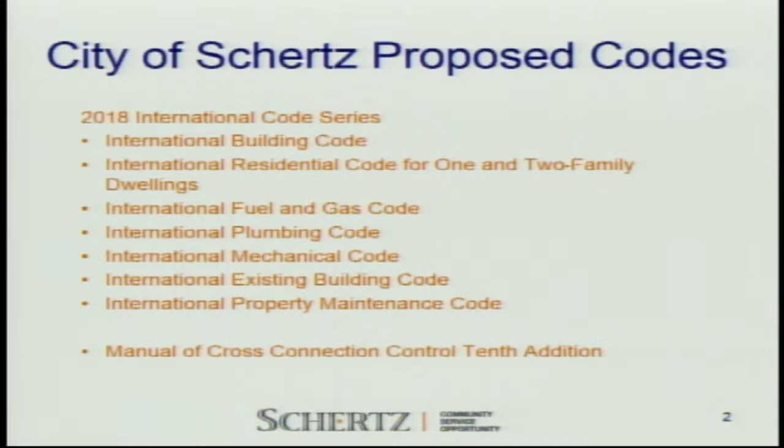What I'm going to propose for y'all is some of the significant changes, not in our ordinances, but some of the changes that have occurred in the books. This will not be a comprehensive list, but it will be some of the significant items that I thought should be brought before the commission to look at.

One of the first things is in the IBC, exterior balconies and elevated walking surfaces. There's going to be a new requirement that they provide detailed directions on how these are to be built. Because of the number of balconies that have collapsed across the United States over the years, this was brought into the International Code Council, and they've adopted new standards for these.

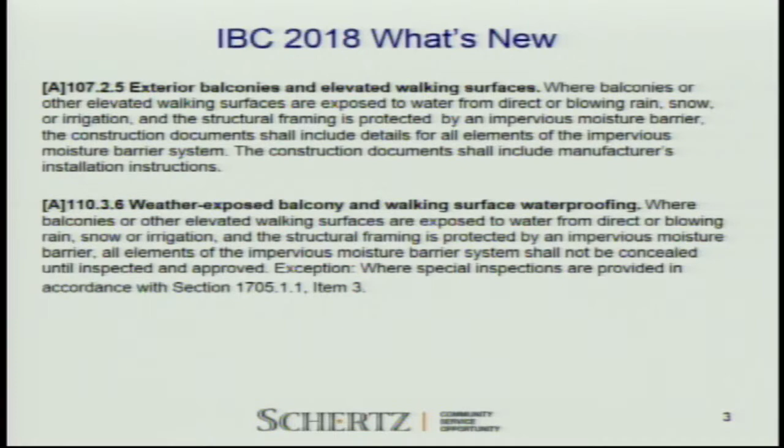In the International Building Code, they redid the items addressed as classifications of use under R2 for apartment houses, living facilities such as boarding houses, convents, dormitories, fraternities, monasteries, hotels, living and work units, hotels and motels.

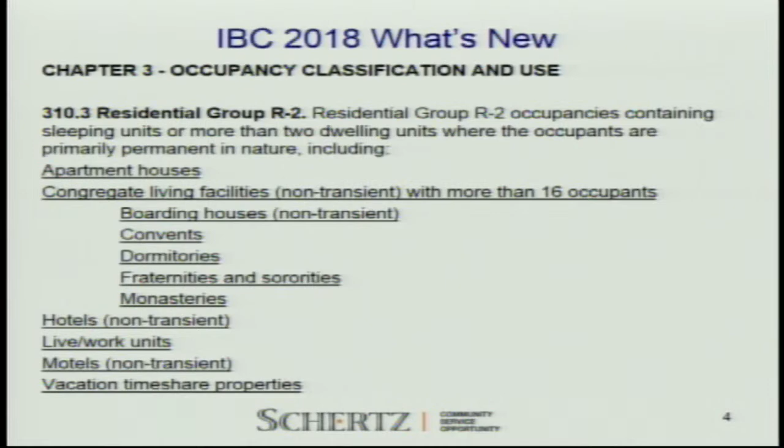If anyone has any questions on any of these, stop me and I'll answer any questions y'all may have. Another section that has been redone is Group R3, where they've included quite a few new definitions, and this primarily is around boarding houses and lodging houses. I think this has a lot to do with the bed and breakfast.

I'll ask you a quick question here. Do these two changes have any impact on our crash pad thing? I'm sorry, sir? The crash pads where we're temporarily renting to - that's what I was referring to by those bed and breakfasts. Is that what you're talking about? Well, no, no, that's okay. I don't want to get any - I just was wondering whether this had any impact on definitions of those things.

No, not at this time. I think what you're talking about is more of a zoning-related item that we've talked about before. Okay, thank you.

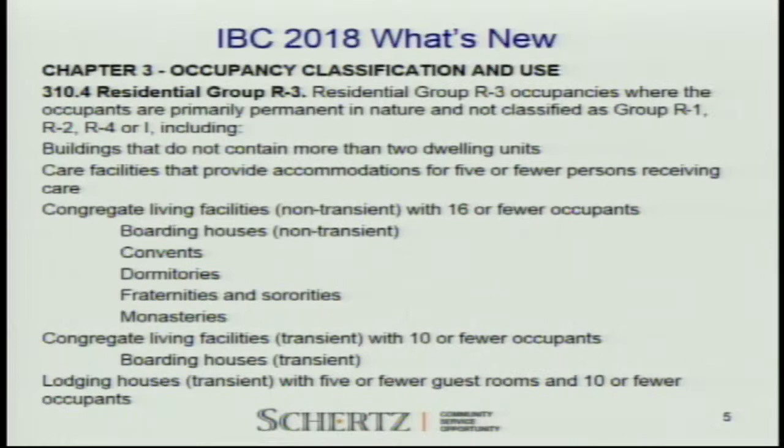Mezzanines in commercial locations, there's been a little bit of a better definition. It describes what you can and can't do with a mezzanine as far as it being an equipment platform in combination with a mezzanine, and it gives some new limitations in the building code as to how that use is to occur.

Another area is incidental uses where they have a stationary battery system, because of what we just experienced with the cold. We're going to see more of these coming into play, along with solar systems and generator sets on residential, commercial, industrial type facilities. This new code will have a definition where it's going to have to be separated by a 1 hour partition, or 2 hours in certain locations. That's something new that's coming in.

And then a crossover, which really surprised me, was electrical installations and transformers. There's going to be some new requirements that are actually referring back to the electrical code for what type of firewall and what type of egress is going to be necessary for an electrical installation, which I thought was very unusual. I was not aware ICC was even talking to the National Fire Protection Association, which they apparently are now.

Occupant load - there's been some changes which are going to be beneficial to small businesses and other locations in the city, where they're increasing the size of the square footage per occupant to 150. Previously it was 100. So you'd have a very small building, say 1,500 square foot, that would, because you're looking at the gross floor area, normally require one or more restrooms, or 2 restrooms, a bi-level drinking fountain, and a mop sink. By going up to 150 gross on the occupant load, that's going to drop that number.

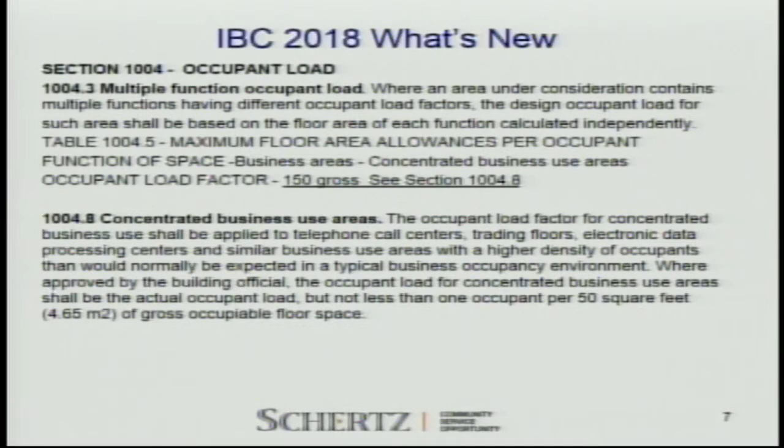The International Mechanical Code, this is just something I thought was interesting. For system controls for exhaust, that'll be the exhaust fans located in restrooms or other areas exhausting from a kitchen to the outside. Now those devices have to be identified as to use. Most of the time it's pretty simple, but in a restroom or kitchen, if you have a remote fan or something built into your Jenn-Air, you'll have a device labeled as an exhaust, and you'll easily identify what it is.

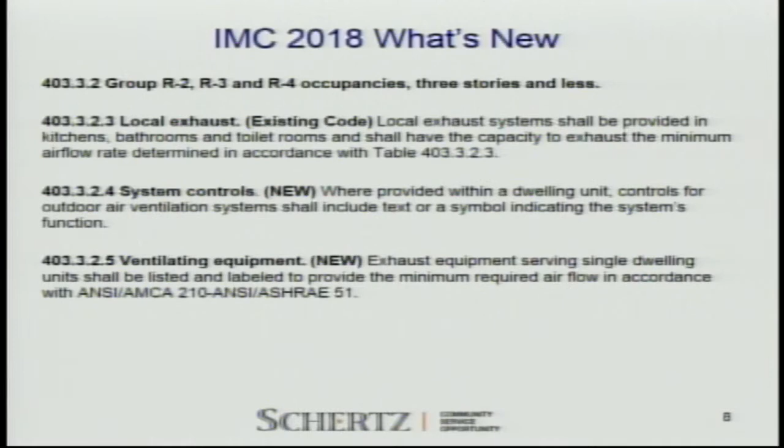This is going to be new. This is actually a carryover from the fire code into the building code or residential code for when you have solar panels installed on roofs, assuring an egress pathway from the second floor. If you have a second floor area or a bedroom on top of the second floor, that individual would have to use that window to escape. Now there's a requirement that the exit has to be easily defined, has to be at least 36 inches in width, and has to lead to an exterior portion of the roof that can be egressed by that individual, providing for self-rescue.

Another one is the setbacks. There's some requirements for that, normally 36 inches on both sides of a horizontal. So this is going to be in conjunction with the fire code. This section, I'm not sure if it still exists in the fire code, but it's been moved over into the residential code also.

So we'll be working in conjunction with the fire department to do these reviews on the plan reviews, and also to ensure that when we go out and do the inspections that all these requirements have been met.

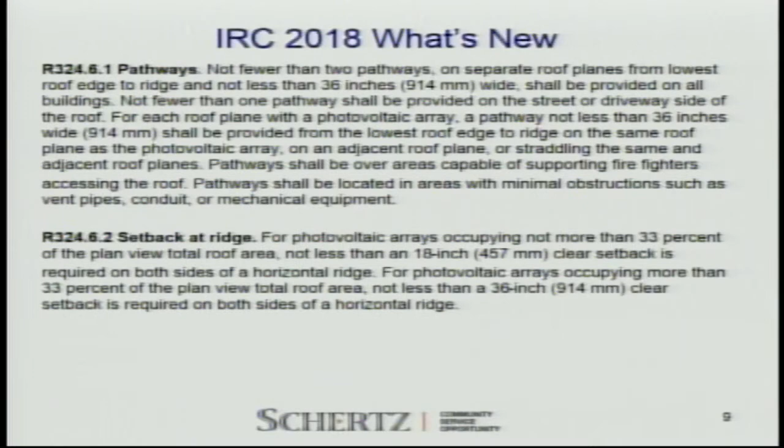And this, again, goes back into the rescue openings I was just referring to. Emergency egress and rescue panels, modules shall not be installed on the portion below an egress window. So I want to make sure that a child or an adult can easily exit that area and gain access off the roof.

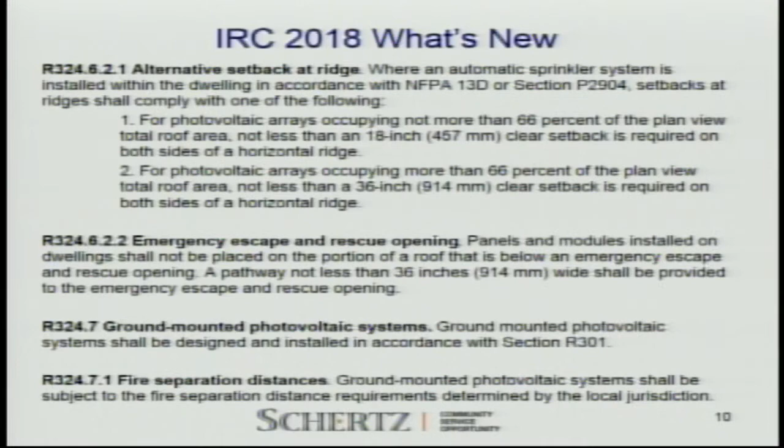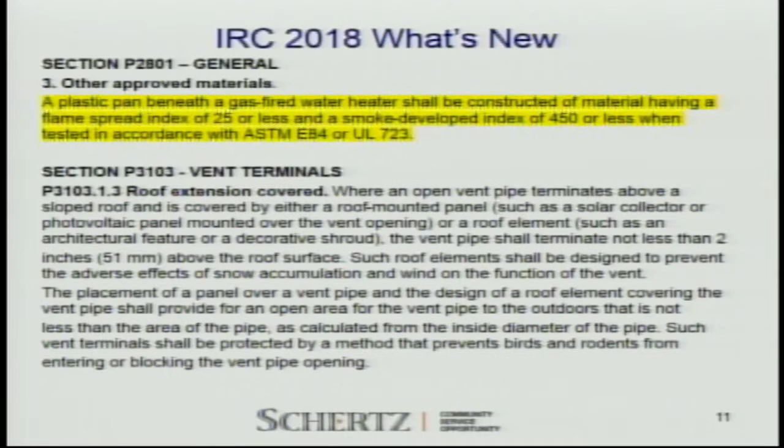This is one I just brought up. I wanted to show this because this is a plastic pan under a gas-fired water heater. It can be constructed of a material which could be plastic, as long as it has a flame spread of 25 or less, and has a smoke index of 450 or less. In the International Plumbing Code, exactly the same thing - it says a plastic pan shall not be installed under that same gas-fired water heater. I don't know why there's a difference between those two.

And that'd be up to y'all if you want to continue to accept that, or if you want me to change that and put that as a suggested alteration to remove that and have that continue in both the IRC and the IPC as the same standard.

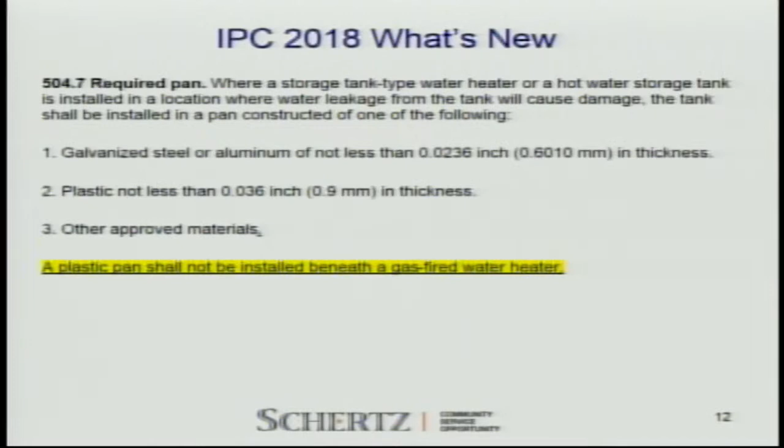This is brand new. This is the National Electric Code. This is something that has been coming for a number of years. Everybody is familiar with arc fault and GFCI type devices, or the combinations they have in houses. Those devices are very prone to failure. There's been a lot of failures. So what the National Electric Code has determined through the National Fire Protection Association is that the cause of this is overvoltage coming into the building from either phases slapping together, your neighbor's air conditioning unit, or a utility coming on and putting a voltage surge through the lines, causing these mini computers located in these devices to fail.

So what they have now done is added a brand new section in the electrical code, both as part of Article 230 and this section here at 242, over voltage protection, which requires either a T1 or T2 type device - a metal oxide varistor - to be installed at or near the service. This is designed to prevent those surges from coming through the home into the house, destroying your electrical equipment. So this is what the electricians have decided and have suggested as an alteration, also coming from the manufacturers of these devices, to help prevent those devices from failing so frequently.

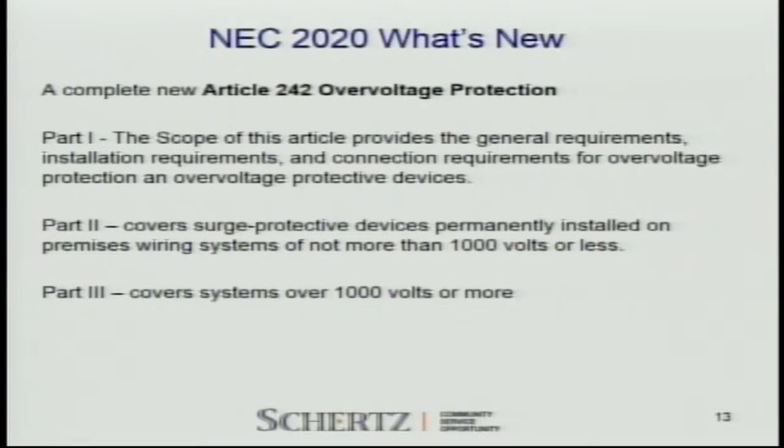And this is Article 230 where I was talking about, where it either has to be a type 1 or type 2, and this will apply even if the service is just being replaced on an existing home. So if the house has a service that burned down, or if the service is being upgraded, these new requirements will go into play.

What kind of cost delta is that? There's a bunch of different types. You can get the type that's a breaker you install, which goes to a MOV unit installed on the side of the panel board, or it can be ahead of the main. They run anywhere from $60, the ones I've looked at, to $150 or more, depending on the device. Most of them are sacrificial in nature, so they're designed to take a surge and then die. I've seen both alarm types, and I've seen ones with just a light that tells you it's no longer functioning. I personally prefer the light and signal device.

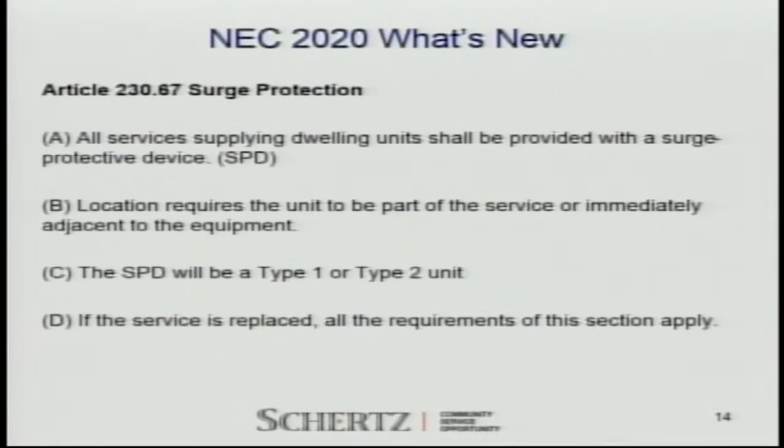Now, some of our local amendments, which we're asking y'all to consider for approval to take to City Council: we deleted wording in Article 1, the beginning of the code. We recommend updating and deleting a lot of the wording to bring the codes into consistency with our digital processes and the types of inspections we do now. We've also added changes to the licensing requirements for electrical, plumbing, and mechanical.

There's currently a state bill requiring mechanical contractors to comply with the same requirements as electricians and plumbers, which means the city cannot charge a fee for registration. By doing this, we're actually ahead of the game, beating the state to the punch on adoption of this code. This also pertains to insurance requirements, no longer requiring those licensed by the State of Texas to provide insurance to us. We'll be able to easily look online and verify the contractor actually has the insurance.

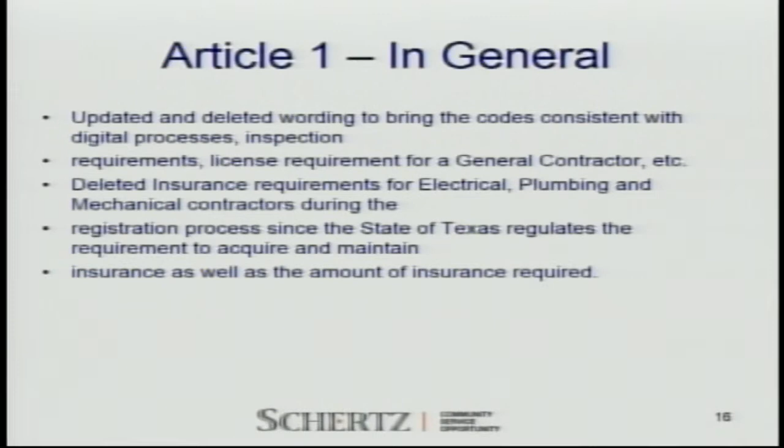For the building code, we've added definitions for pergolas, arbors, and trellises under 300 square feet, defining what an arbor, trellis, and pergola is.

We're asking that y'all consider and recommend to City Council that rooms and spaces for all handicap restrooms have an emergency light fixture, and also that an emergency light be placed in classrooms near an exit, either at the primary or secondary. The building code has also adopted very stringent requirements for remote locking devices for classrooms, because of everything going on in our days and times. I won't cover that today, but I feel this is a life safety feature, which I hope you all consider recommending to City Council that we adopt.

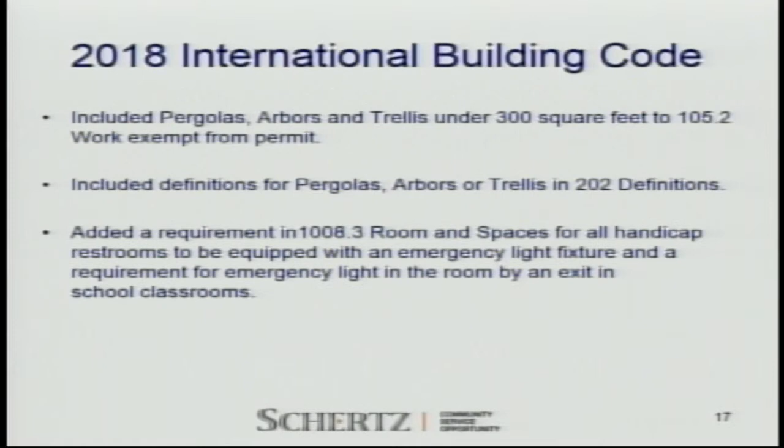We deleted 8 of the engineering foundation requirement documents, leaving only 2. The rest of these 8 will be covered under special inspections. We've also updated our sound attenuation requirements for the certification process, which will allow the contractor to sign for it.

We've added an appendix for shipping containers being utilized for permanent use, along with a lot of requirements as far as details for how the units are to be constructed, what letters or documents we need indicating the structure is safe, and requirements for foundation and placement, as well as protection for surrounding neighbors within 500 feet of the unit, ensuring an approximate same value of construction and type of exterior attributes of the building.

So if you've got a 4-on-12 pitch on all the adjacent roofs, this structure will also have to have a 4-on-12 pitch. Or if it's all masonry around you, you've got to have masonry on this. So there are some protections built into this new ordinance that I put together.

Another quick question. I thought the change in the laws last legislative session meant we couldn't dictate construction materials anymore - the state withdrew that authority.

We don't have that authority, but what we're doing is stating that materials just have to match the surrounding structures. So if you have a $400,000 house and somebody wants to build one of these containers next to you, they have to use similar components as your house, in order to maintain taxable values and home equity.

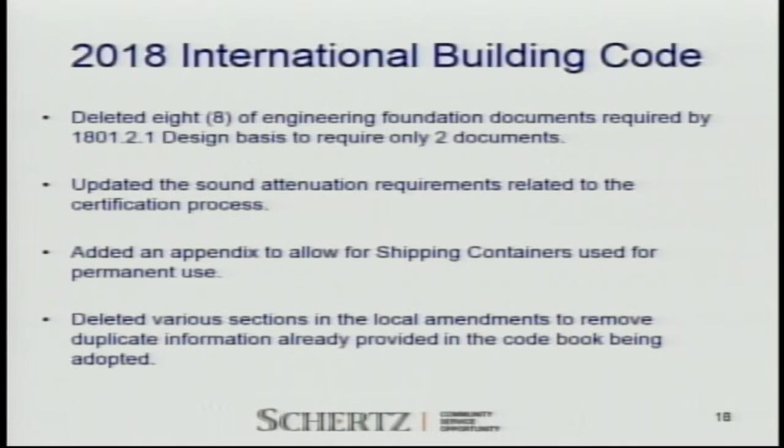In 2018, we covered the same thing with arbors and trellises. We just adopted that straight across the board, and it applies to both residential and commercial.

For the foundation requirements, we added an exemption for engineered foundations under 300 square feet, where we provided the worst case scenario. Instead of having to dig through the book, I wrote it all up to make it simpler to design a foundation.

It specifies 24 inches deep on the outside or to a bearing strata, gives the type of rebar to use and the spacing. I tried to include as much detail as possible to avoid requiring someone doing a small addition to hire an engineer.

I don't think there will be any deviation in the amount of security or stability of that foundation as long as they follow the minimum design standards.

We did delete 7 of the engineering foundation documents. We're requesting that the board consider going down to 3 documents. We're receiving almost everything we need now through our plan reviews and inspections. By reducing this to 3 documents, I don't believe we'll be reducing at all the assurance that the customer is still getting a good, stable, reliable foundation.

We also added a table that's required by code called Climatic and Geographic Design Criteria. It's very extensive, covering details for wind loading, snow loading, atmospheric occurrences on the building, and it also helps with designing the air conditioning system for the structure.

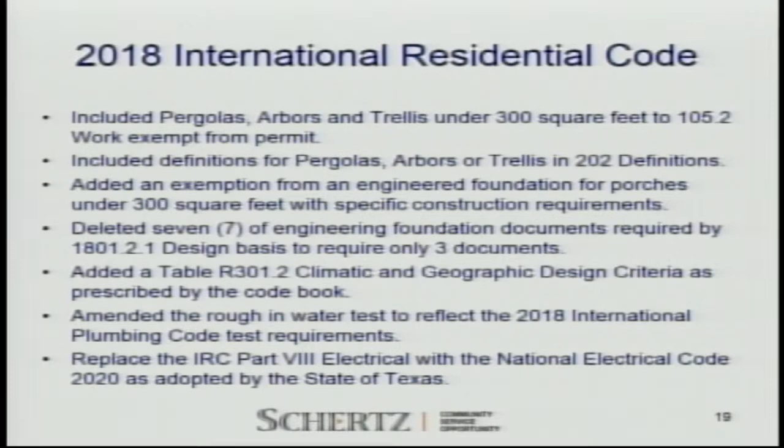We're recommending the adoption of Appendix M, home daycare; Appendix P, sizing of water pipe systems; Appendix Q, tiny houses; Appendix R, light straw clay construction, which is pretty popular up in Austin right now; Appendix S, straw bale; and Appendix U, shipping containers. We adopted it both in the IBC and in the IRC, so it has the exact same requirements.

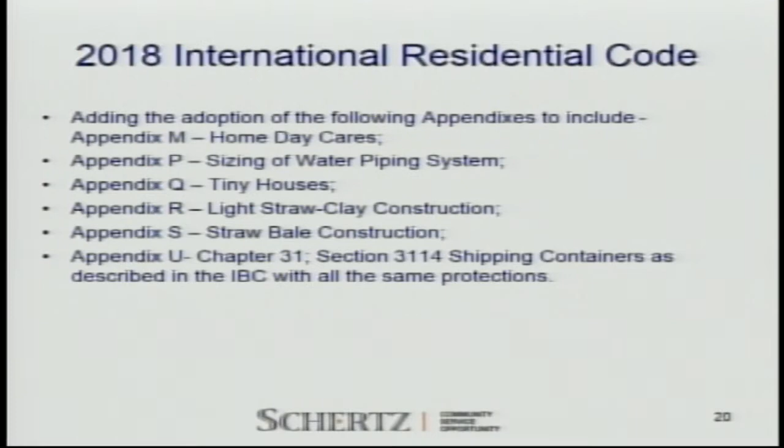The 2020 Electrical Code: we're deleting branch circuit requirements for bathrooms because that's now covered in the new 2020 code. Minimum ampacity is covered in the 2020 code, and dwelling unit receptacle locations in bathrooms are covered in the 2020 code as well.

We added section 230.70(A)(1), a requirement for services to be readily accessible, to help define what is readily accessible. This applies to both residential and commercial locations. The current 2020 National Electric Code addresses residential homes as being readily accessible, but it does not address commercial or industrial locations. Our current code takes it one step further, and the national code is just catching up with us.

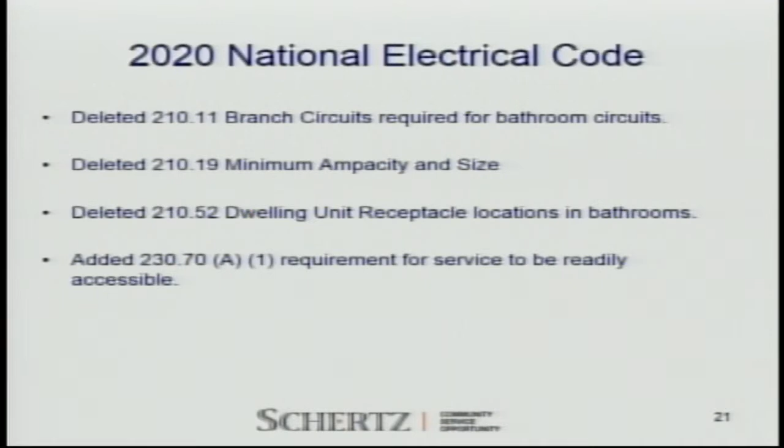International Plumbing Code: we're deleting pipes through foundation walls. We're deleting the testing exception for lawn irrigation systems because that's already covered under the plumbing code and the IRC plumbing code. We deleted Table 702.3, sewer pipe for cellular core. We're just going to let the manufacturer's installation instructions mandate how that piping is to be installed.

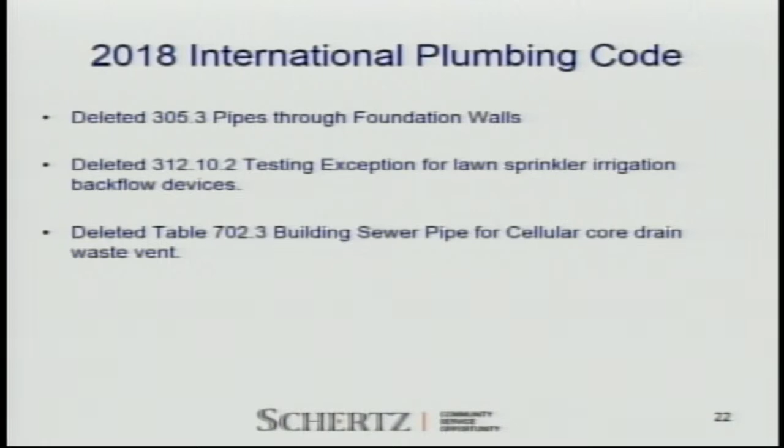For the plumbing code, we're also deleting Appendix C, vacuum drainage systems, because this has been added to the code as an actual requirement now—it's in the chapters. It was changed to Appendix C for structural safety, which was included. We deleted Appendix B, rates of rainfall, but kept Appendix D, degree day and design temperatures, and Appendix E, sizing of water piping systems.

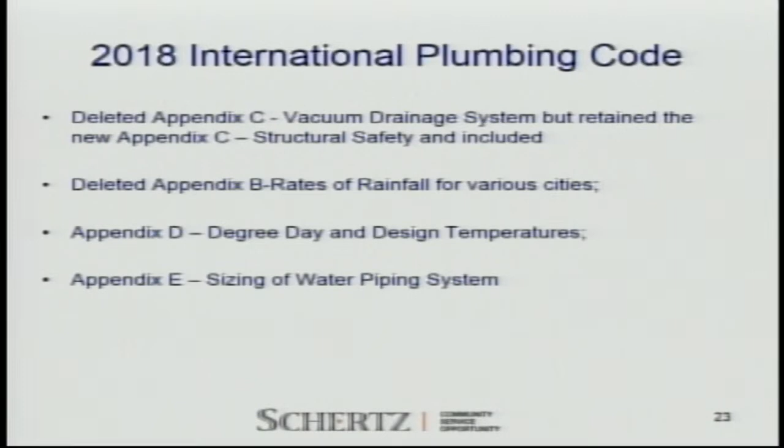The other codes, which we don't have any changes happening to, would be the International Fuel Gas Code and the International Existing Building Code—no changes. The International Swimming Pool and Spa Code had its appendices deleted because that was adopted by the state of Texas. It is now regulated through the Texas Department of Human Services, I believe is what it's called, so it's mandated through the state now.

We didn't make any changes to the International Existing Building Code. There are no changes to the 2018 International Property Maintenance Code, and no changes to the 2009 Manual Cross-Connection Control edition. We didn't recommend any changes; we just kept it as is, which defines the location of these RP devices for residential and commercial industrial facilities.

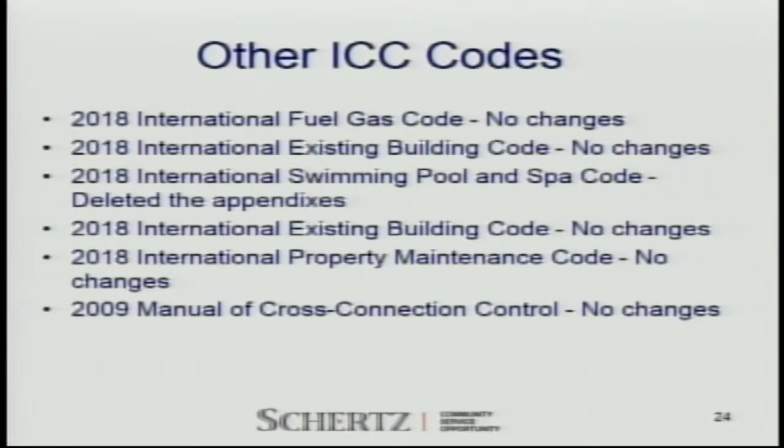That concludes my presentation. There are quite a few other slides with a lot more detail on some of the significant changes in the code books—that's another 50 pages. If y'all want to see those, they'll be available, or if you want to talk about them now, I can run through anything that y'all would like to discuss.

I do have a question. I just happened to come across a situation with your backflows for irrigation systems. One of the requirements is that it's a certain height elevation above the highest sprinkler head, and I know I've built houses with backyards upsloping or tiered where that thing's not going to be 20 feet in the air. So I don't know how that's addressed now.

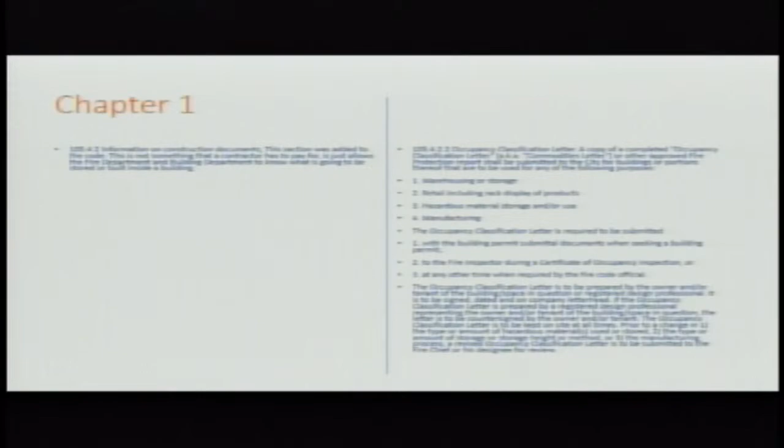If I could insert something here to help my fellow commissioners. This occupancy letter is used during plan review, and it has a lot to do with designing the sprinkler system to the correct standards. It's really helpful to know what they intend to put in the building so you can ensure the fire protection systems are designed correctly. Is that correct, sir? Yes.

So if you've got like a magnesium factory, a water sprinkler is not going to help you out in that situation. Well, it could be, or they could design it to require a pump, a large diameter pump system with more heads - not for magnesium, but just in a general sense, high pile tires is going to require something different. So it's important that we know that, but it basically makes the appropriate system be designed based on exactly what's there.

There are quite a few variables, and it has to do, as the chief said, with what you're storing, how high you're storing it. Is it wrapped in plastic or not? Is it in cardboard boxes? In addition to the product itself, all of those things impact the design requirements, sprinkler spacing, water flow requirements, and all those kinds of things.

For a long time, what we were doing is if the contractor couldn't tell us exactly what he was putting in the building, we made him design it to worst case. So this just makes it a lot easier for the fire department folks, and it's more focused on the installation for the design company. They don't have to do the whole building that way - they can do it differently in each area based on what the classification is showing in those areas.

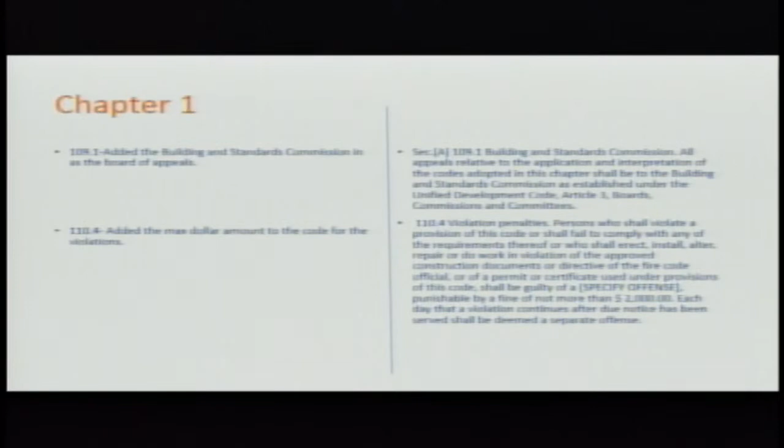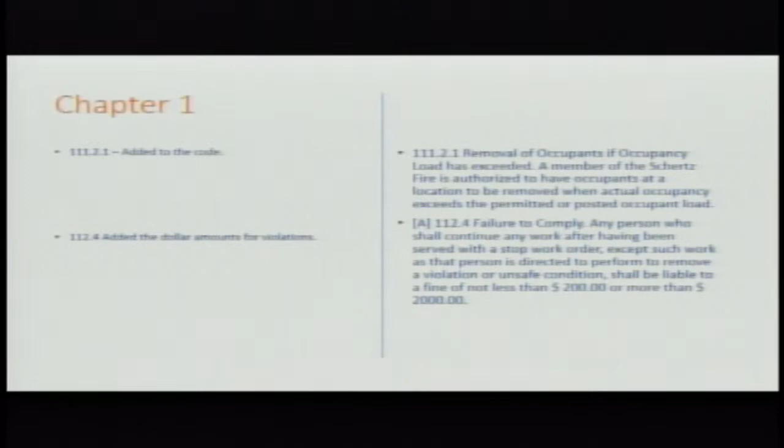Chief, would you rather take questions as you go, or would you rather I wait till the end? Just interrupt me as you go and we can do it slide by slide.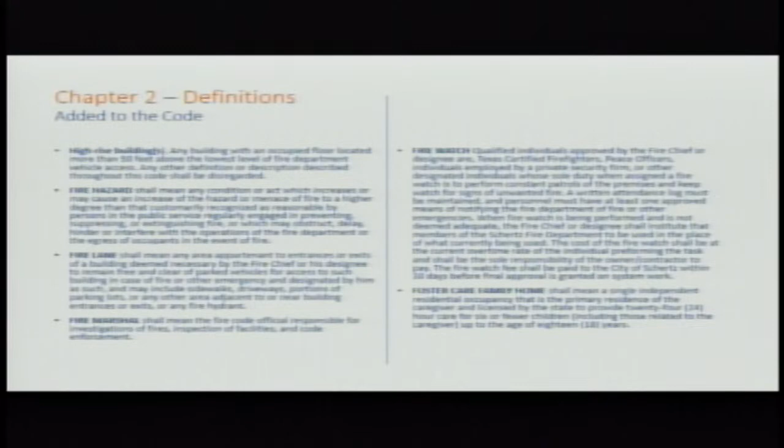Okay, again this is something we kind of updated last time with the mobile food establishments. So again, over on the right, we've added special events. That's one of the new things that come in this code - the occupant load, based on some of the new wording in the new code, is going to put more requirements in place for some of those events as well. So we just kind of defined special event on this one, not a whole lot new in this one.

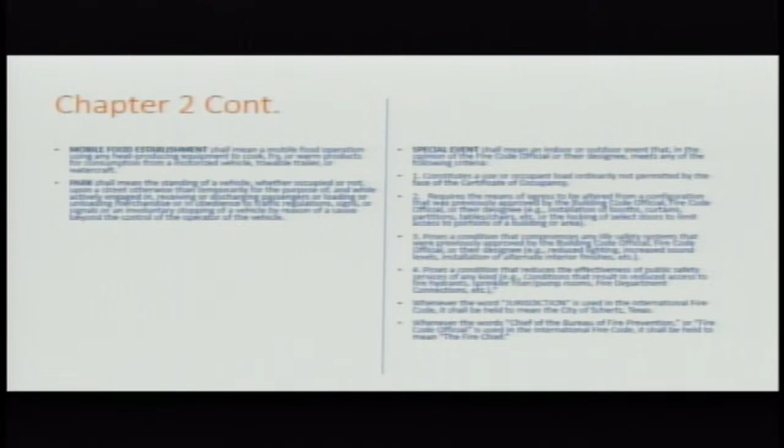Moving on to chapter 3. Looking at chapter 307.6, this has come about before with some memorial services or birthdays, and that's kind of how we ended up here with 307.6 - sky lanterns. We've had like 300 people at a memorial service all going to light candles in a sky lantern and let them float off into the community. So that's how we ended up putting this in here.

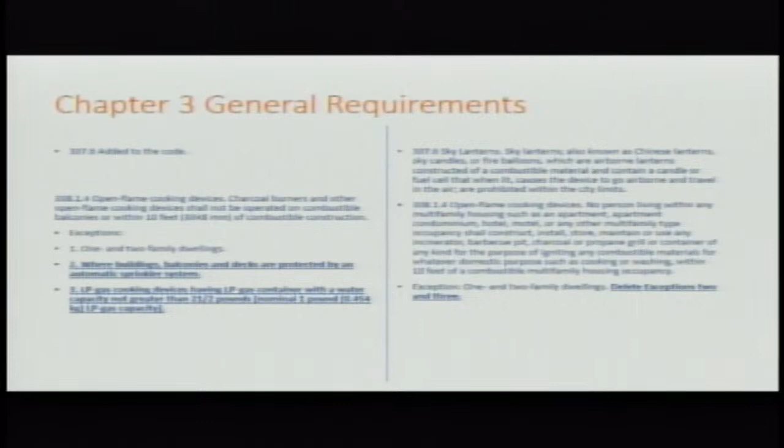Or the other one here on open flame, 308, open flame cooking charcoals. This is meant to be at multifamily residentials, and essentially we're deleting the exceptions here to cook out on a balcony, saying you have to move 10 feet away from the structure to barbecue at a multifamily dwelling.

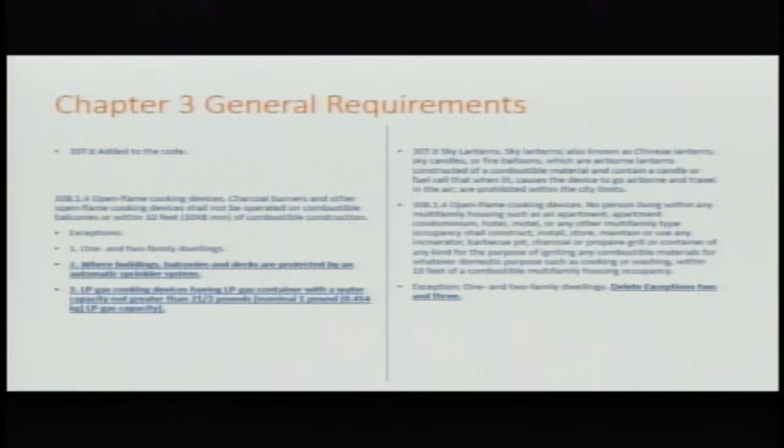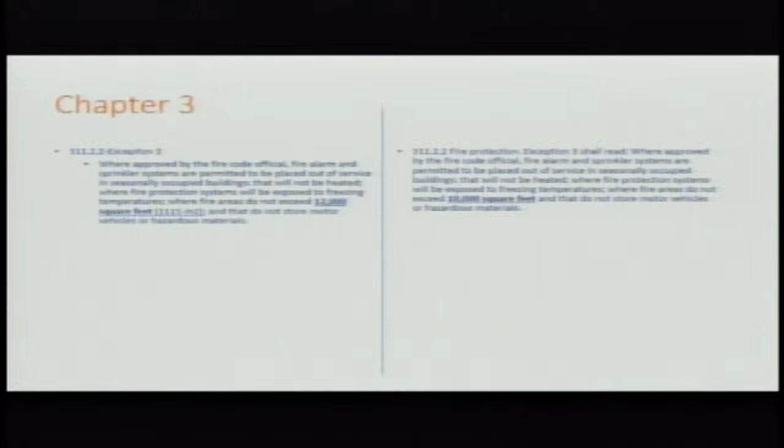In here, this is just a requirement we've had from early 2000s, where we're saying a sprinkler system be installed at 10,000 square feet instead of 12,000 square feet.

Chapter 4, again this was all brought forward, but it just lays out some of the fire drills and stuff for schools. Nothing new in this particular area. The obvious question here was, doesn't the state have requirements? So I looked them up, and yes they do, but it also says if the local authority has requirements, then the school shall follow those. And they've got to maintain records of those as well.

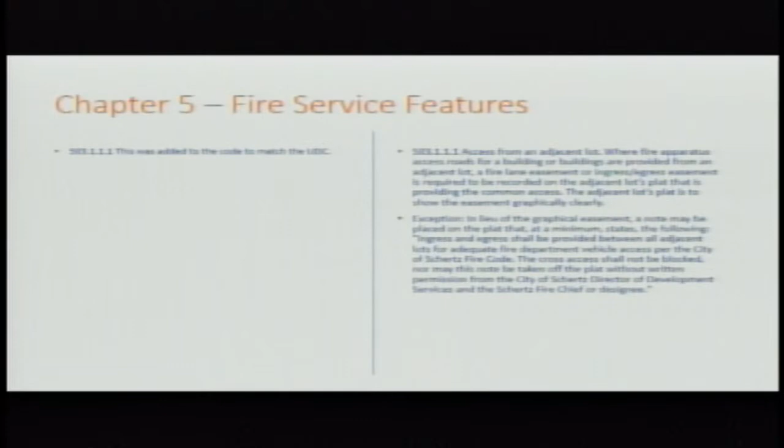Again, just clean up language here from the UDC on this chapter 5. Most all of this, like you said, is just directly out of the UDC and/or engineering.

Yes sir, can you just clarify something for me? It says basically the width is 24 feet, except where a fire hydrant is located on a fire department access road. So does that mean it has to be more than 24, or it can be less than 24 if the fire hydrant takes up part of that space?

Yeah, and so just for your knowledge, what we do on a lot of those is we look at the actual specs on our apparatus, usually the biggest apparatus that we'll be using for that particular design, and that's what we base our code off of, just for your knowledge.

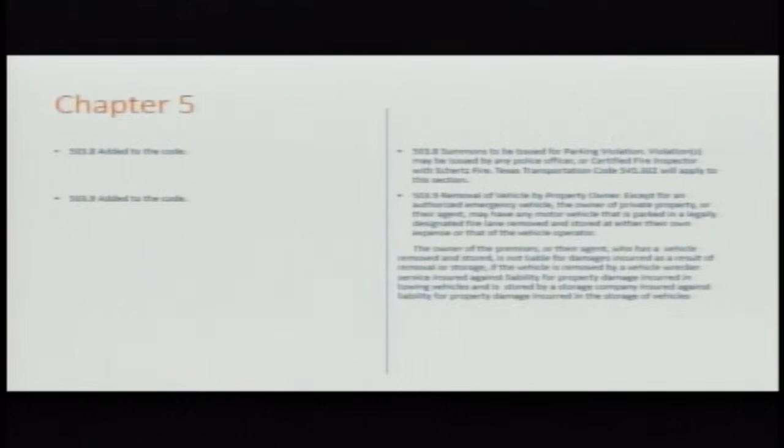Again, just on the right here, most of it's coming forward from the previous as well. When you struck out mountable curbs, was that just meant that we were not going to approve a mountable curb? You have a section in 503.2.1 where we struck out mountable curbs, and I was just curious if I just put in a bunch of mountable curbs, but it wasn't in the fire lane - if that was no longer going to be approved, basically where you have a small little curb to get into your driveway, and that was struck out. I was just curious why. No, all of that was brought forward. That's just going to be language that's in the development. Gotcha, all right.

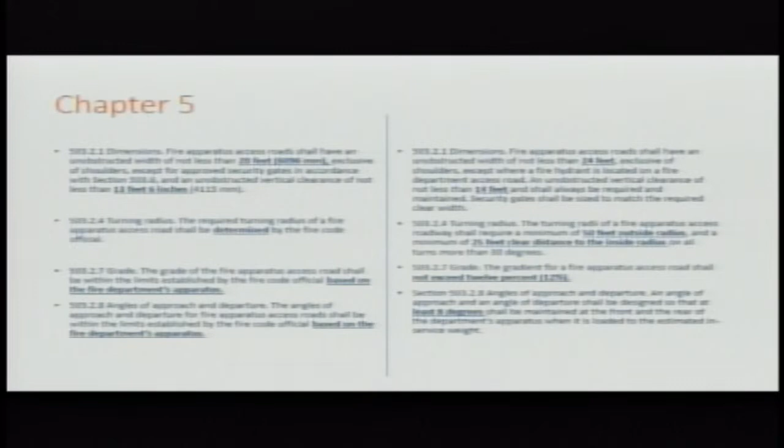Again, all of this is pretty much brought forward as well, just talking about removing vehicles that are parked in front of fire hydrants or in a designated fire lane.

It's like in the movies when you break both windows and pull the hose through. Yes.

Again, this is just talking about, back to the code, not really defining, just saying gates open in 15 seconds, so just putting a number in there for the code is what this is doing here on emergency access gates or HOA gates.

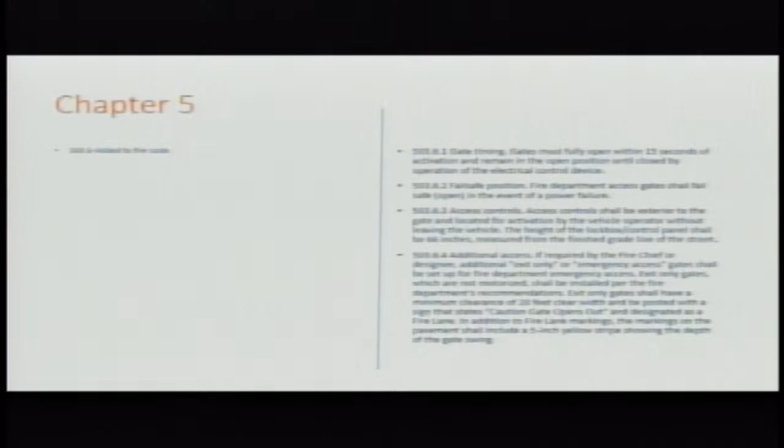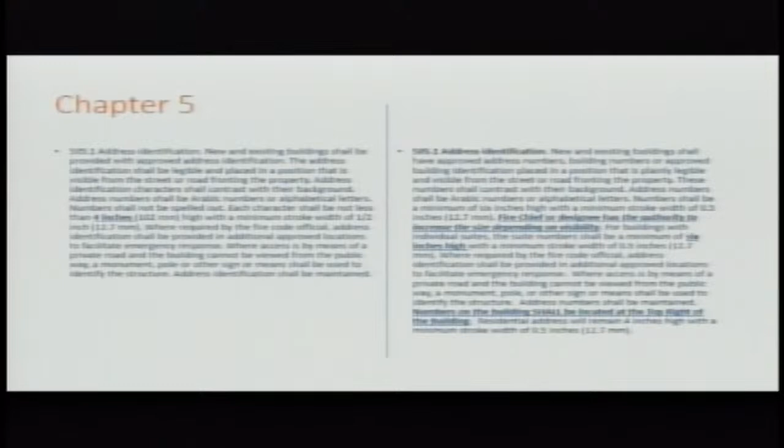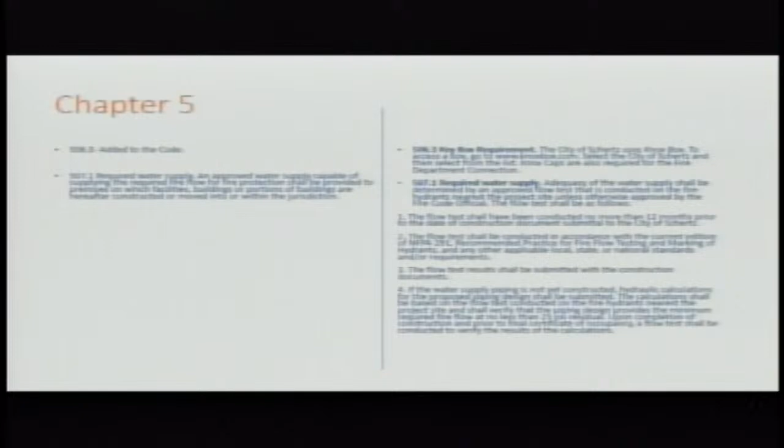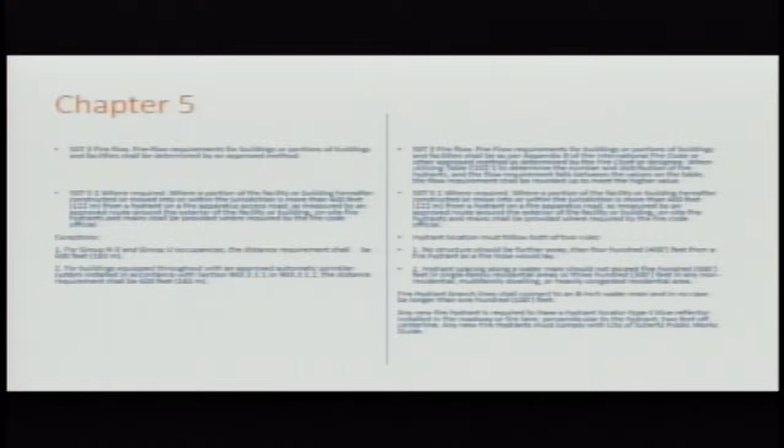Yeah, most all the water is directly from the engineering or public works. Engineering. Yeah. Yes.

Okay. Yeah, I try not to read every slide to you. Just pick some of the stuff. So, okay.

If, because we saw the building department, in their amendments and adoptions, they eliminated a lot of duplication. And that question here is if these things are already defined in another city code or requirement, is it really necessary to put them in the fire code?

So we've talked about that, and like I said, most of what you're seeing here is coming directly from engineering and what they're using, and/or public works. So this just puts it into a code format and has something to stand back on and allow people to see what it is. That's why we try to get rid of a lot of the duplications, but we feel like this part is just kind of cleanup, but it's also important to us coming from the fire side on water. So that's why we felt it was important enough to keep in here, so it becomes, from the fire department standpoint, a code enforcement side from the fire department on these particular things when it comes to water.

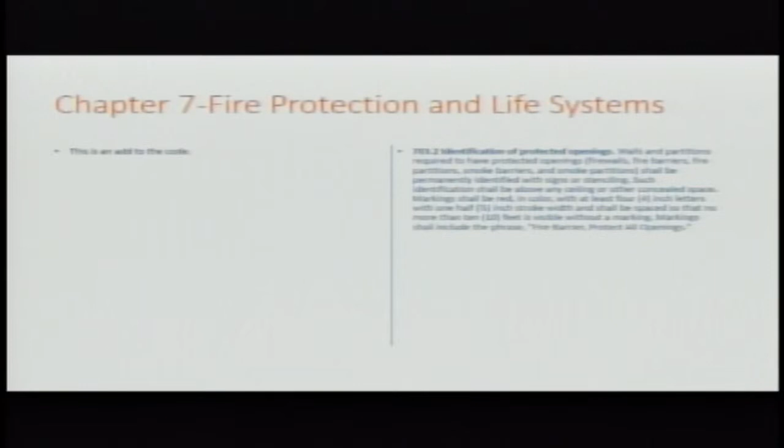And if I might make a suggestion for when this goes before council, it might help them to know that we're proposing, and we've always required above 10,000 square feet. In this case, I think the code says 12,000. So it might be helpful for them to see what the code requirement is if we don't amend it, to give them a better feel for whether we're really asking for that much.

And then on A1, when I look at the 2018 fire code, they have item number 4, 903 for a multiplex cinema. Did you intend to leave that out of your list? The code says the fire area exceeds, I think 12. The fire area has an occupant load of 300 or more. That's out of the code. Number 3 is out of the code, but then they also have a number 4 that says if it contains a multiplex cinema.

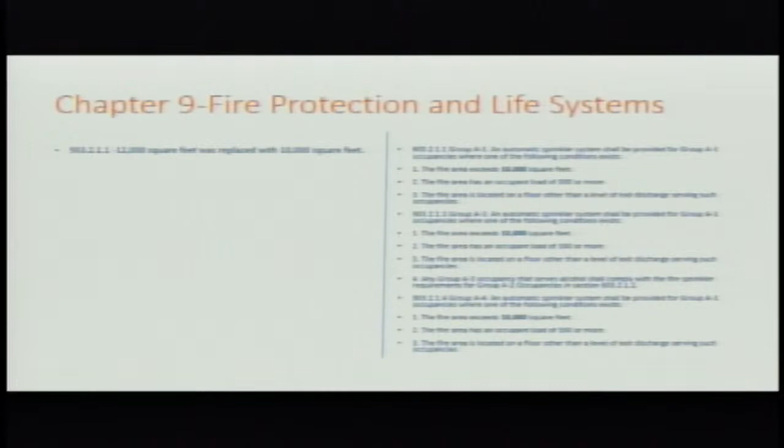There, in the text version, you're saying? Yes, not in the red lines, but in the clean version. If it'll help you, it's on mine, says page 15. Okay. And generally speaking on these, if it's not addressed here, then we're just going with what's in the code. Other than that, so we'll look at that and see.

Again, this is just to summarize. This is talking about adding notification devices on a building that has a sprinkler system in it. So that's summarizing. Yes, thank you.

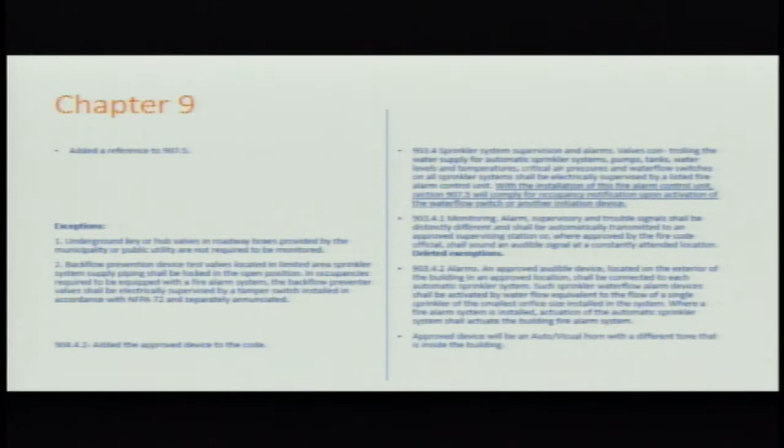I always found it hard to believe that a fire code would require this, but it is possible. You look at these warehouses we have in the industrial area, and they were required to put in a monitored sprinkler system that when activated would send an alarm to a central station, but it wouldn't bother to notify anybody in the building. That always defied logic. Surprised whenever the fire department showed up. So that's primarily what this is cleaning up, and putting in our amendments.

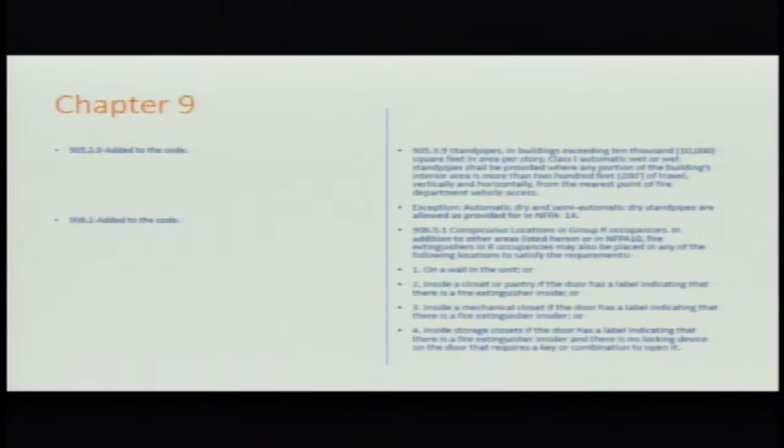I've got a question for you here, Chief. I certainly agree with everything you've written here. And, you know, I've been out of the business for a while, but NFPA 72, the fire alarm code, does it not address any of these?

It does, and we actually talked about this, and it's been something that was brought forward in our code, so we had talked about whether or not to remove it, but we also talked about adding, the number 11 there is a new add about the big fans that shut down whenever the fire alarm system goes off as well. So that's something that we added. And so we discussed leaving it just at the NFPA 72 language. We have done that in a couple other places, so it wouldn't be out of the question to do that here. Well, you know, in some ways, it's a plus. It's kind of that one-stop shopping where somebody doesn't have to look through 2 or 3 documents.

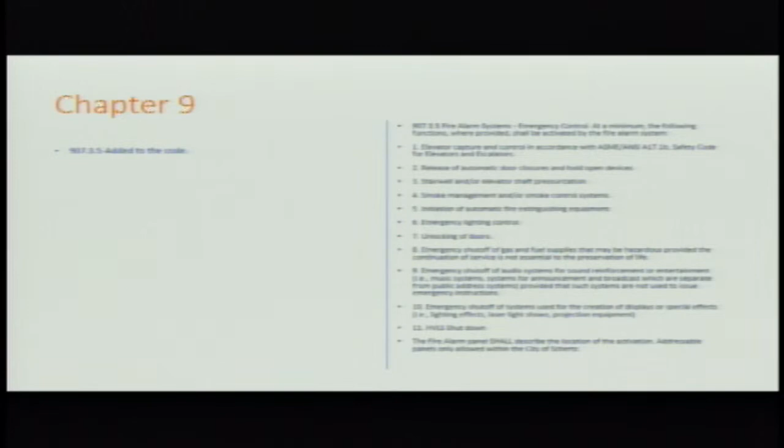This was, again, talking about some sections of the code. This kind of goes along with what we were talking about a few minutes ago about notification systems.

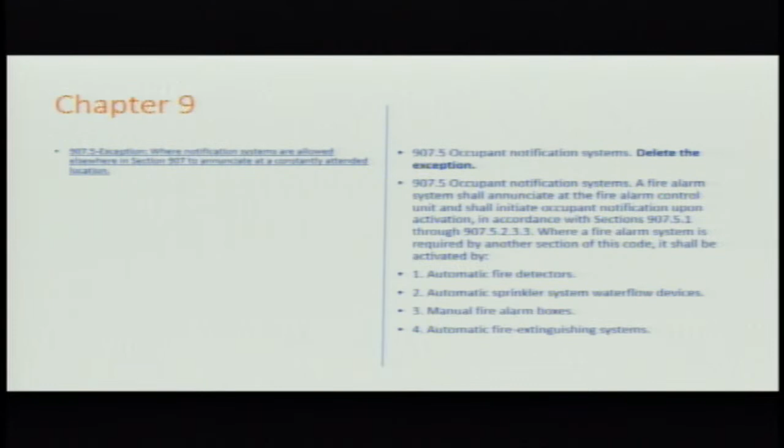Put my glasses on for this one. Again, a lot of this is answering the questions in the code where it says local officials determine. A lot of this is adding on how many feet we use on there, so that's defined. Not a whole lot of change here. Most all of this is just coming forward from the previous amendment.

Same with this is just coming forward as well. So again, this was just kind of going along with what Gil was talking about earlier. Emergency illumination.

Okay, and again, if I can, I guess it wasn't in your slide, but on page 18 of your text document, Chapter 10, Means of Egress, 1003.8 Special Provisions, rooms in E-occupancies used for daycare, children 5 or under, classified as an E-occupancy shall not be located above or below the first story. I thought that was a requirement somewhere else, that they couldn't be, or am I just thinking too far back?

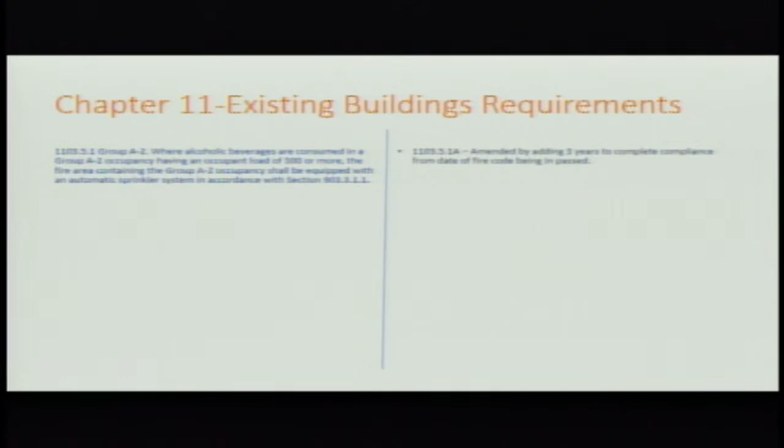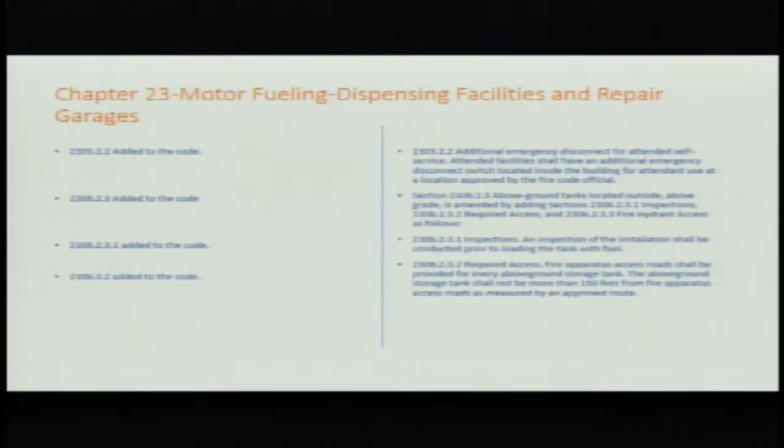Yeah, again, as you see here on the dispensing facilities, just to add an emergency disconnect. I think the only change on this one was going to 6-inch numbers.

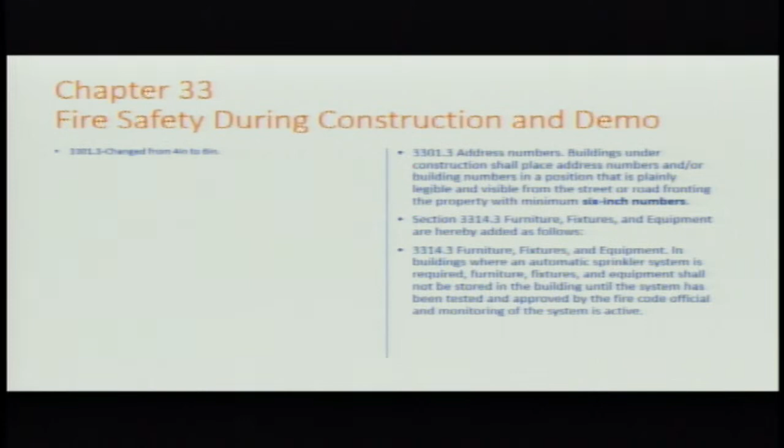That's most of it, so anything else, Glenn, that you thought of that we need to further look at or clarify? You know, that's really what our amendments are. We hit them all. And I apologize, but these things are near and dear to my heart.

I'm reading on the NFSA website that I think Mr. Outlaw is 100% right that there are some retrofit requirements in the International Fire Code, but there are some loopholes where retrofit might not have to be required. It talks about the way the floor plan is outlined, that in some cases you could have firewalls that segregate certain areas, and then now you're different. Maybe not all the buildings here need to be retrofitted. Maybe there's a loophole here.